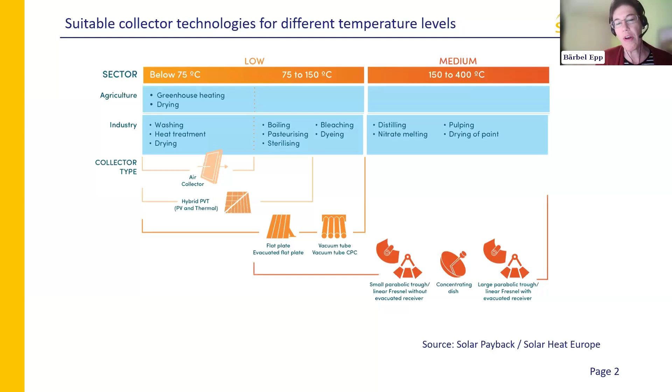We have developed a world map of turnkey solar process heat suppliers. This gives us a chance to send them questionnaires each year to find out about trends in the market. And this is where my presentation is based on. We started these kinds of surveys in 2017. We have 68 turnkey SHIP project developers listed, none from Australia yet. That shows that there is still something to come up. But maybe this new Mars project and the big ARENA funding will do something good on that.

We have painted here the world's largest solar heat plants, and you see that there is one Australian installation among them. This data arrives from the Solar Heat Worldwide publication, which is the biggest report on solar thermal news and data. We have this 36 megawatt Australian tomato farming plant, where a tower plant provides heat for the glass houses, for the heat, the water purification. It's a very fertile plant, and it goes along with the biggest plants, the 8 biggest plants worldwide.

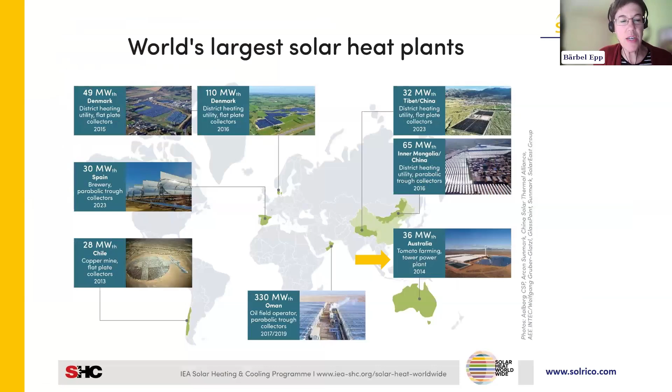We have this, which was already mentioned, this Mars pet care plant. And if you compare now the size of the plant, we end here with 28 megawatt at the moment in Chile, which is a copper mine, flat plate collectors. And you will have one with 18 megawatt.

So it already comes close to what we call the largest plants around the world, which is really good news. And I will hop over that, as we have even somebody from Mars with us today, which is really great news. Yeah, so this is the development of the SHIP market over the years.

We have now a tripling of the capacity installed worldwide, still on a lower level, but it's more than 1,200 systems that we have installed. The annual additions are marked here in orange and in gray. The gray bars in 2017 and 2019 have a special background. It was capacity additions in a big SHIP plant in Oman. Maybe I should say that we call SHIP solar industrial heat. So it's a short form for using all types of solar industrial heat systems and technologies.

And this SHIP plant in Oman was a rather large one. It was put up in phases, but then the project developer, which was GlassPoint at that time, went bankrupt and the project stopped, even though it was foreseen to be larger. We have seen some increase in 2023 again after a bit of a plateau in the Corona time. I think the project development times got longer in the Corona time, and so the dynamism has started now afterwards.

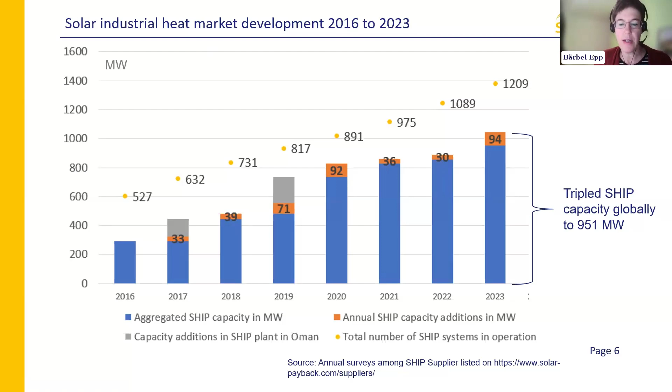We see that solar heat is most popular among food, agricultural, and chemical businesses. These are the businesses which mostly use solar industrial heat systems at the moment. And the largest plant built in 2023 was the Heineken brewery in Spain with 30 megawatts.

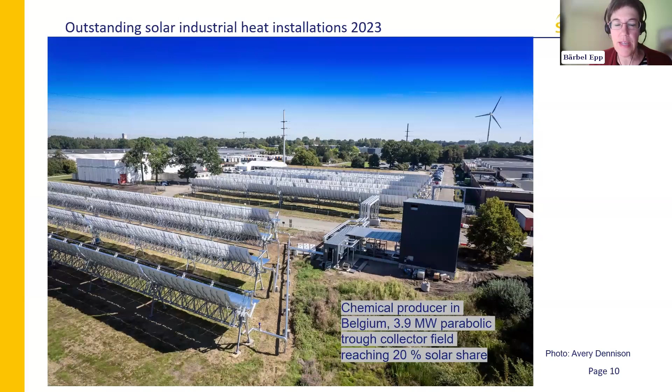Actually, the project developer of this plant is the same one that got the turnkey contract for the Mars project. It's Azteq in Belgium. Another project in a completely different region, Mexico, is providing 160-degree steam for an ammonium nitrate producer. You see, in a desert-like situation with very nice yields.

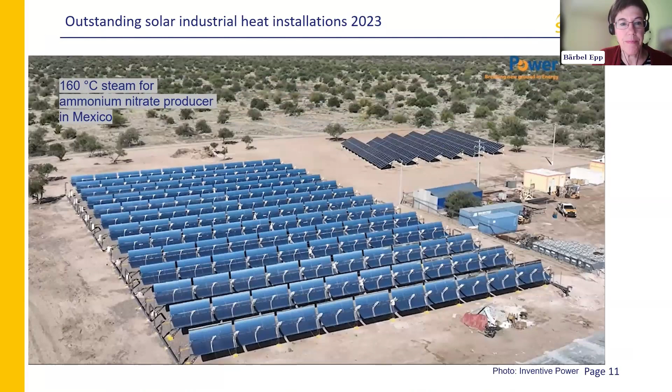Again, this time a heat purchase agreement with Heineken. Heineken has a strong decarbonization target internally and is investing a lot next to their factories in decarbonization technologies, and often it's solar thermal. They provide 220-degree steam, and it's linear Fresnel collectors. They are a bit rarer at the moment than parabolics, which are the round ones, which will also be installed at the Mars factory. But we have a provider in Spain who did this plant.

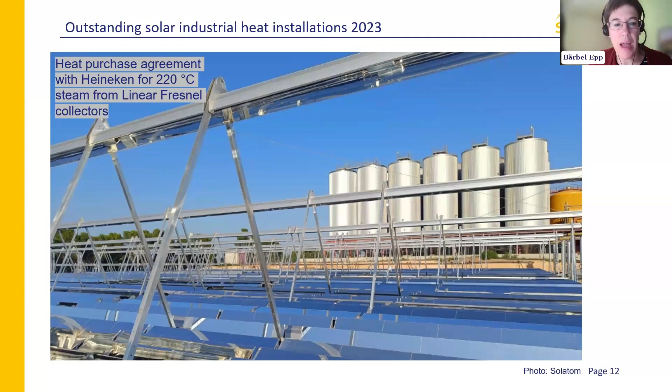And we see a lot of novelties in this field. The number of parabolic trough manufacturers, particularly in our world map setting, is increasing. And this is one of the newcomers from Austria, and I wanted to share this with you. It's a completely different setting. Normally, you have the parabolics, which are stiff, you know, on a mirror, a bent metal or a glass mirror. And here, everything is made from foil.

It's delivered in a container, as you can see here, rolled up, and then the metal rings are put up along a 200-meter row, and it's blown up. And the foil in the middle, the concentrating foil, is also made from polymers. A completely new setting, and we are looking. They have now the second plant. It's a startup, so we will see how costs develop.

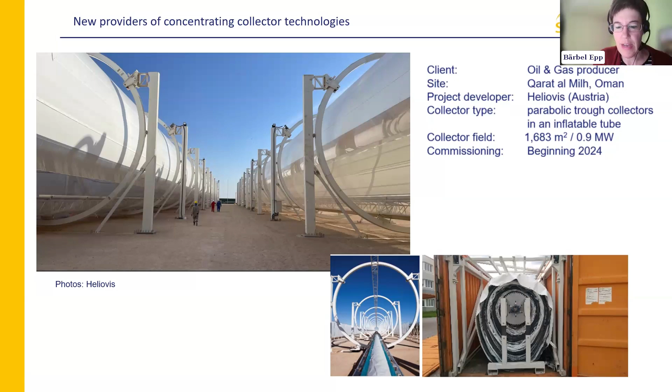I was asked to talk a bit about the enablers of the SHIP market growth. I think we have seen very good results from financing feasibility studies in Austria in the last 2 years. I would like to know whether ARENA in Australia is also paying feasibility studies as a preparation phase. I'm not sure about that. Investment grant subsidies obviously drive markets. We have these kind of subsidies in Germany, Netherlands, Belgium, France, and Spain, and they usually produce also larger plants that we have seen in the statistics in the last years.

We have cost-effective solution markets with high fossil fuel prices, mainly oil in Mexico. Mexico is one of the strongest SHIP markets that we have worldwide. And we have the individual carbon reduction targets of multinational corporations, as I have talked about with Heineken.

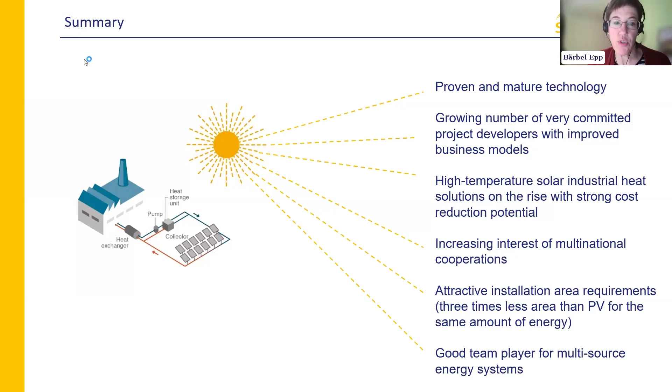Wonderful. Thank you, Bärbel. You mentioned there about ARENA doing the studies. Yes, they do. They co-fund studies. I think about 250,000 Australian dollars is where they start. But absolutely that is available to help with kicking off projects. Co-funding only, which can be a bit of a hurdle, but it is there available, which is great.

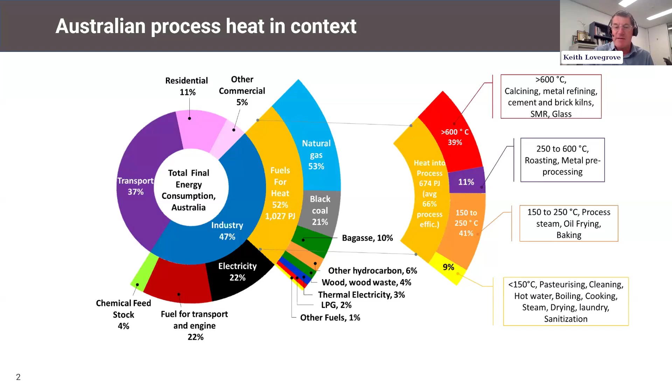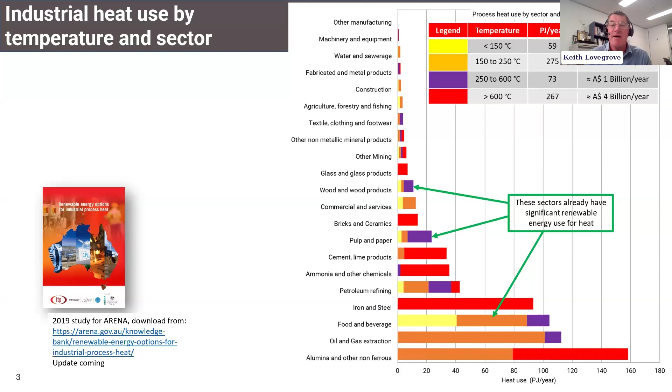Iron and steel is an interesting one. We've got the whole discussion of Australia as a potential exporter of green iron into the future, but that's a very long range story. And then other sectors going on down there with different temperature splits.

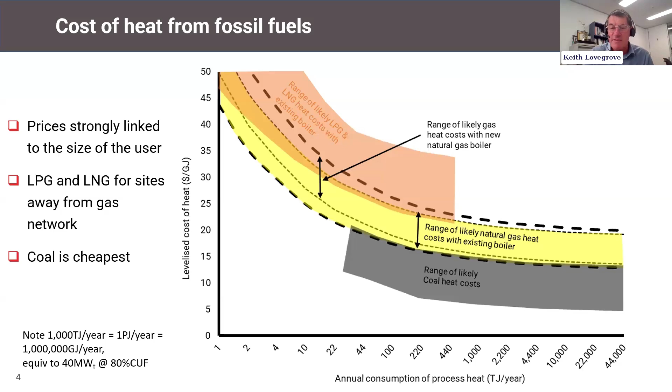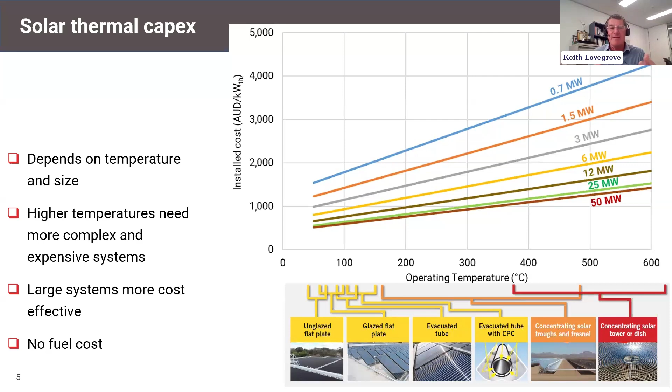The bigger systems are more cost effective than little systems. So you've got this capital cost depending on both temperature and size. If we then translate that, how does that compare with what we're paying for heat from gas or coal or LNG at the moment?

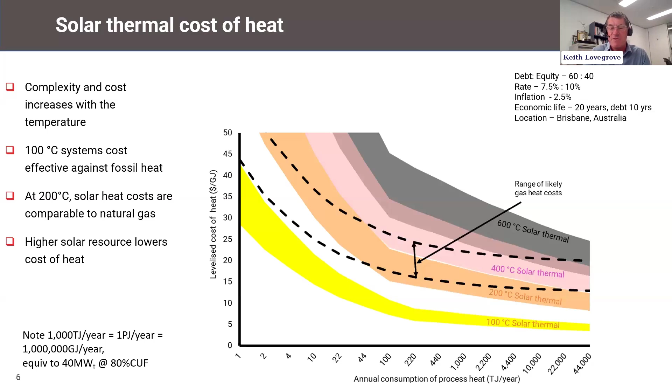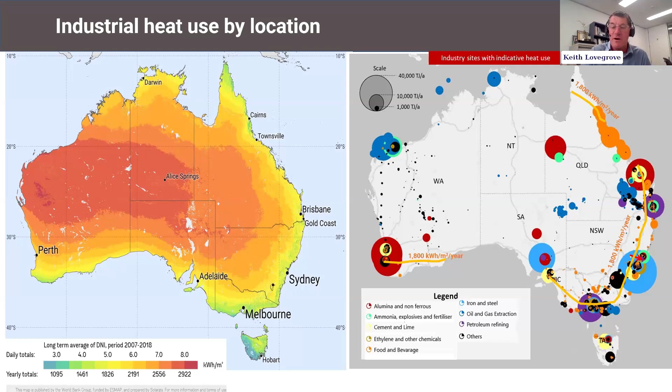But what you see is there's an awful lot of our country that looks very good for solar thermal, and it's probably not the best choice for Tasmania. But at the 100 degree systems, they look so competitive that we might do them in a much wider array of locations as well. So I thought I'd show a few case studies as well.

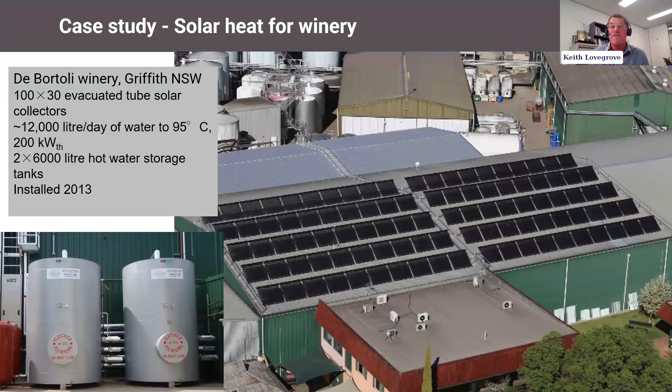This one in the winery in Griffith is a really classic one because it's only 200 kilowatts thermal. It's 95 degrees C, and I think really we should seriously look around the country at a lot more of that sort of installation. There should be a lot of opportunity for that sort of thing.

Bärbel already showed this, and it's worth showing just because of its scale, and it's interesting. What I'd like to point out with this one is that this is a combined heat and power system. So you've got a tower system there, which is capable of huge temperatures which you don't need because fundamentally they're trying to do desalination and keep a greenhouse warm. But what they're doing is using the high temperature steam to do some power generation in a back pressure turbine, then getting the process heat.

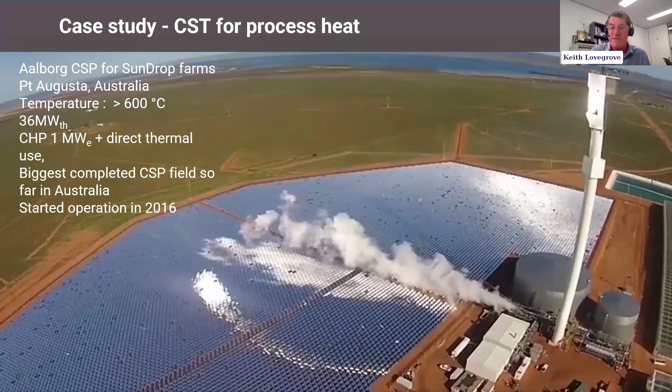And that's a very interesting configuration to think about and has its own favorable economics. I would say, though, that in that combined heat and power system, the electrical turbine is very much undersized for a 36 megawatt thermal array, but that's just the business decision they made for that plant.

Mars Wodonga, which Paul will talk about in a minute, is very good news indeed for the industry globally, but certainly in Australia, to see this progress. And Dominic Zahl showed me this morning, there's live cameras on the site, and they've already started site work. So that's very impressive. A project's real or realer when the site works have actually begun. So I was very impressed with that.

So my conclusions: decarbonising process heat is a major challenge.

I mean, we all know that. There's a lot of talk about electricity, and the word electricity gets muddled up with energy in some discussions, but end use energy is only 20% electricity and it's 30% heat, and we really have to think about it.

The smaller sites are paying more for their fossil energy. Solar thermal heat is cheaper for large sizes. Solar thermal costs more for higher temperatures. This leads to the economics looking pretty encouraging in the 150 to 400 degrees C range, and below as well.

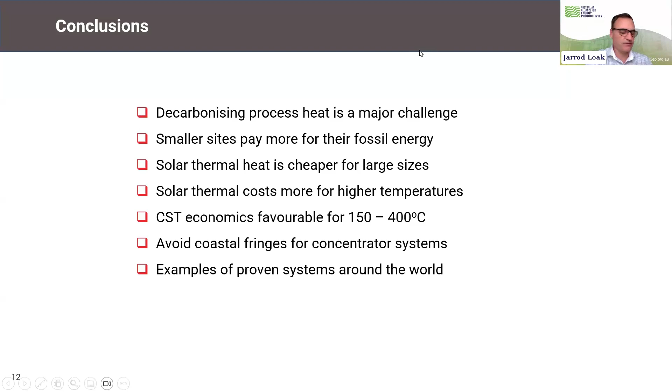Thank you. Brilliant. Thank you so much there, Keith. And we've got Paul Matuschka online. I'll ask him to come off mute and have a few words about the new project in a moment.

But Keith, very happy to see that you're doing an update on the heat assessment there for Australia. You did that fabulous job in 2019 with ISF and BZE and Pitt and Sherry and the like. We've used that document so many times, that donut graph that you made, fabulous. So really excited to see a new version of that one coming, that's for sure. Good. Yeah, thanks, Jarrod.

And then to Paul, congratulations on getting this project ahead, and great to see ARENA on board and supporting you. Paul, Keith just mentioned that you've already started a bit of groundworks there. What's the time frame for the project?

Yeah, thanks, Jarrod. I probably just want to acknowledge first, thank you to A2EP that supported us, with ARENA's backing, when we did a pre-feasibility study into this back in late 2019, early 2020. So that is definitely very important work to help support some of these projects, and this is a result of that collaboration at the start.

So where we're up to is obviously Mars in this release, and the Prime Minister's there, and Keith's slide, announced on the 29th of October that Mars Wodonga, Pet Nutrition Australia, for our Wodonga manufacturing facility, has a 100% renewable energy solution. One of those projects is concentrated solar thermal, which is co-funded by ARENA. The civil works has commenced, and Keith, I shared that website with the global team yesterday and copied Dominic on it, so it's probably front of mind.

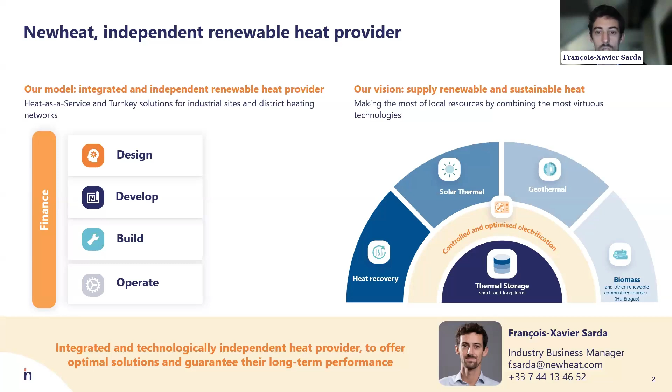Today, I wanted to share with you 2 case studies. One of our solar thermal project in France for a dairy factory, and one case study for a project we were studying in Australia recently in New South Wales. But before diving into the case studies, I wanted just to take a large view of solar thermal and, from our perspective, how solar thermal works and where it makes sense.

Very simple slide here, but very important from our point of view as a heat provider. These are the four key factors that impact the economics of a solar thermal project. Of course, the first and obvious one is the sun radiation. The more sun you have, the better the system will work and the more energy you will harness from the sun. Then, as the previous panelists talked about, the target temperature, and I think the graph Keith showed us was quite obvious: temperature impacts the efficiency of solar thermal systems, whatever technologies are used. The lower temperature we work at, the more efficient the systems are and, in the end, the more economically beneficial the system can be.

Then, Keith also mentioned that, the scale of the project: the larger, the better economy of scale we can reach and the economics get better. And then of course the last lever is financial incentives when needed, and what ARENA is doing in Australia is quite inspiring as well. We have strong support in Europe and in Australia and other parts of the world, and they are helping to align the economics of the project with current fossil fuel prices.

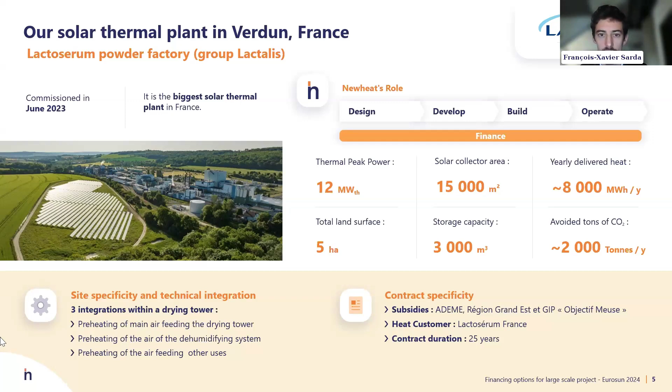We will look for that on the next slide, but this is a system where the solar heat is used as a preheater of fresh air. The plant itself is using air to dry some milk, to transform milk into powder, and the drying process occurs at about 200 degrees. However, they are using fresh air, which is heated up to 200 degrees, and the fraction from ambient temperature to 80 degrees is at lower temperature, and this is where we are integrating the solar thermal heat, the solar heat. Here's a more schematic diagram that might be easier to read.

So you have the solar thermal plant, 15,000 square meters, I mentioned. We have a big buffer tank. It's basically a big hot water tank, 3,000 cubic meters, which is very well insulated and very well stratified to make sure higher temperature on the top, lower temperature on the bottom. And then through some water to air heat exchanger, we preheat the fresh air before it's heated up by the existing installation of the factory. So it was an existing process where they have gas burner and steam heat exchanger, and what we've done is adding an additional water to air heat exchanger to preheat the fresh air.

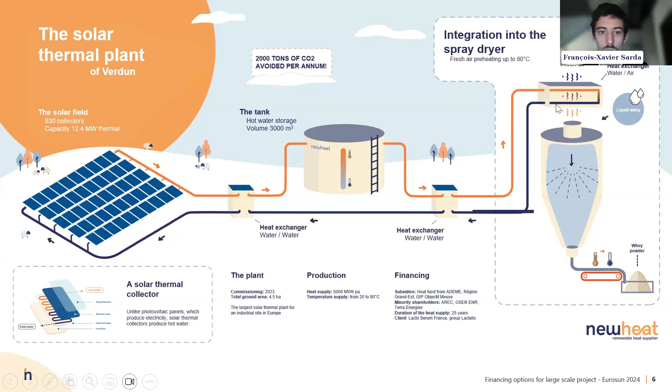Well, the sky view of the project where you can see the solar thermal field on the back, this big storage, which is between solar and the factory, and the factory itself with the spray dryer inside the tower. Some specificity about the project: it was kind of a challenge, even though we are very close, and we've been lucky enough to find some land close by, which was not belonging to the site, but we found it ourselves. You may see there is a railway between the site and the solar thermal field. It's a small one, but it's still a railway, and it was kind of a challenge to manage to cross it with hot water pipes.

Not so much technical challenge, but more on the approval with the competent authorities. It took us a bit of time, and just saying, developing a solar thermal project is a long journey and not an easy one. It takes time and resiliency. I think Paul mentioned first studies for the Mars project were done in 2019 or 2020, if I heard well. Well, that's a typical time frame for a solar thermal project. A few years of development to align the finance, the approvals, technical studies, and so on.

And a quick zoom before I move on to the next case study, a quick zoom on the heat exchanger I mentioned to you before. So it is a water to air heat exchanger that we install inside the process. And I didn't want to talk more about the heat exchanger, but more about process integration. Temperature is so important for solar thermal, but also for other technologies such as heat pumps, where we have the same issue of having better efficiency at lower temperature.

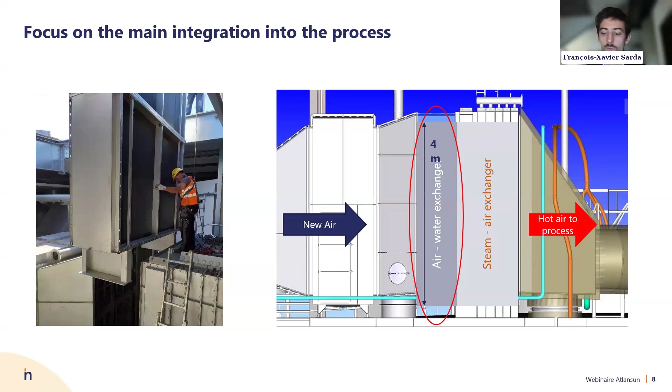From our perspective, this is a very interesting business model when the industrial site does not have the capex capacity, or doesn't want to invest into energy systems, preferring investing into its own process and into expanding the site.

I'll quickly run through a case study we had in Australia. This is for a meat industry in New South Wales. Very specific one, but very interesting as well, where this was a site where steam is used as a main energy vector. But when we've been on site, we realized only one very small process really needed steam. All the other processes were using heat below 100 degrees.

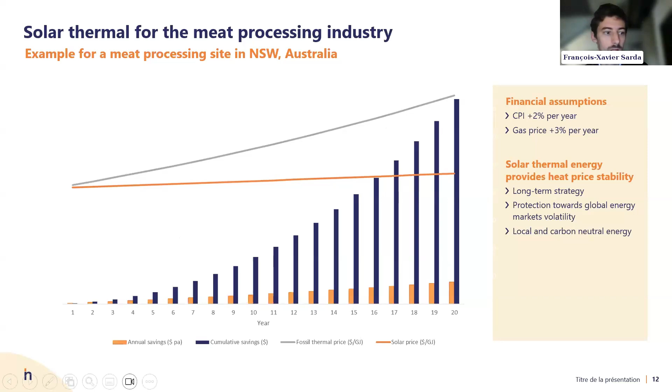I've been very quick on this slide, but that's time for my conclusion. It's going to be very brief as well, but from our perspective, solar thermal is a key technology for heat decarbonization. Its main forces are providing stability and independence from the grid. It's not connected to gas price, to electricity prices. And we hope we'll see more of these projects in Australia. Very happy to see the Mars project moving here, and hopefully we'll see more of this in the future.

Brilliant. Thank you so much for that, Francois. And this really highlights that opportunity. And I like the milk dryer one; it's got to open your mind up to say, we don't need to replace the entire amount of fossil fuel steam production or hot air for the dryer straight away. Hey, what can we do with solar thermal here and now and at least do part of it? So that's a great reminder. We don't need to do this all in one step as well. So thank you. Absolutely great.

We're about to go to a panel discussion, and I'll have Mark introduce our final panel member in a moment. But before we do, I just wanted to share some news. Bärbel asked before, do we have any sort of local champions in Australia for solar thermal? And the answer is yes. We have Impacts Group, and I think Peter Blackmore is on the call today. We might be able to bring him out of the audience to chat on this if need be.

Amazing announcement just came out recently that Impacts has been awarded a grant and is going to be part of the Charles Sturt University Agricultural Centre of Excellence, where they're going to actually install a demonstration plant for solar thermal alongside some other technology. So this is a fabulous step forward, and their technology looks fabulous as well. Looks like it solves a lot of issues of installation cost and time, and even materials. So Peter, can't wait for that one to come into a demonstration and see much more from Impacts going forward. So I just thought it'd be worth bringing that one up.